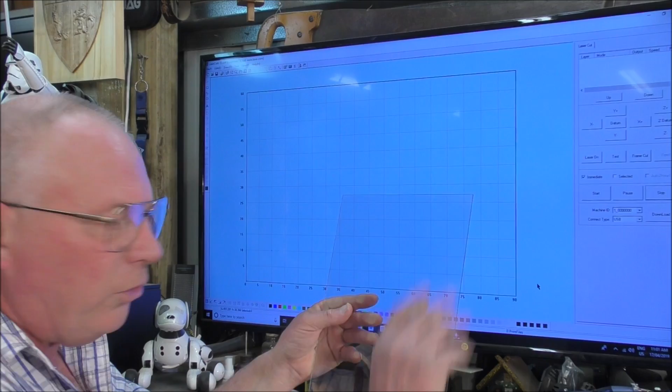Okay, so when you design a product, you start off with, I've got a piece of glass here which is about 1.5 millimeters thick, and it's 210 millimeters, which is 8.25 inches, by 295, which is 11.75 inches. So we're going to make a picture frame, and this is going to be incorporated, so everything is measured from this.

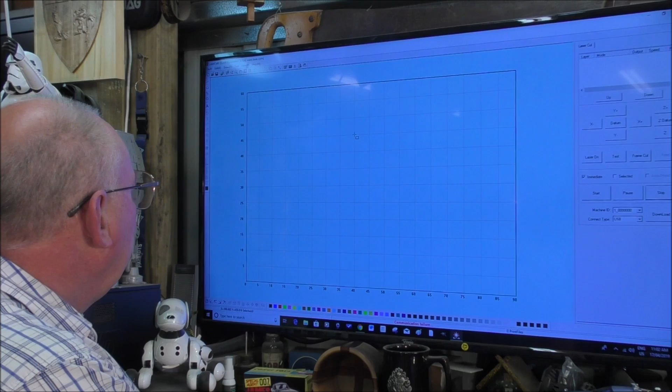So I'm going to quickly show you the process now of designing directly in LaserCut. And this is a very, very simple thing to design. So you just start up here and you choose rectangle, and you just come anywhere in the drawing area, it really doesn't matter, and just click once, draw out, click again, then go to the highlight tool, come to one side, right click, and then go to size.

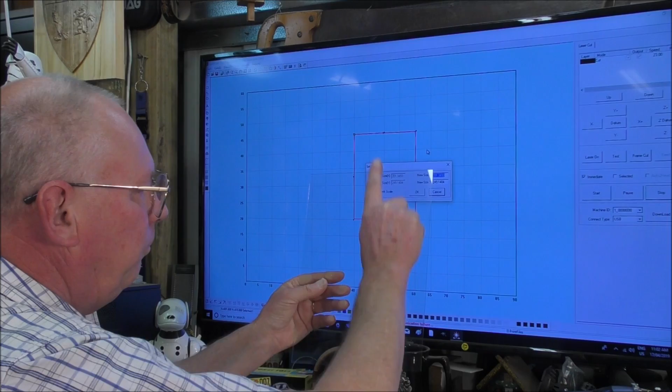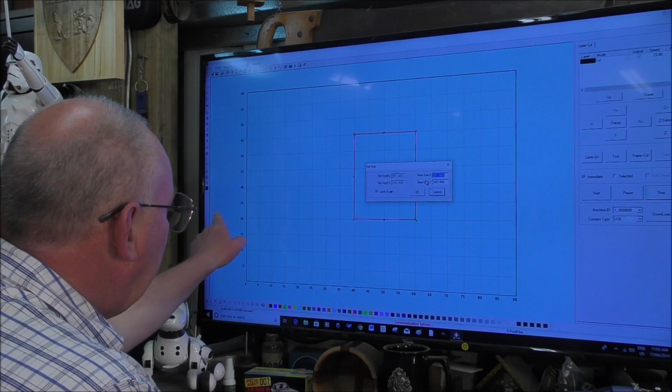Now in our case we need the open area, or the cutout area, to be slightly smaller than this. So we're going to make it about 5 millimeters or so smaller all the way around, so the glass doesn't fall through. So in this case it's going to be 285 by 200. So in the X, which is this way, it's going to be 200.

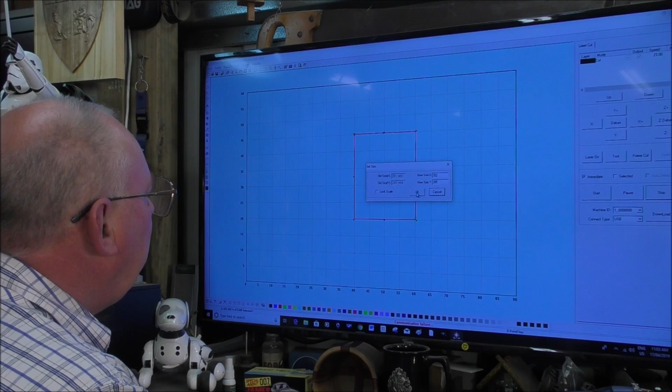So by the way, uncheck this, because otherwise if you alter the one, the other one will correspondingly alter with it. It will alter the aspect ratio. Okay, so in X we want 200, and in the Y we want 285. I press OK, and now it's gone to the right size. So it's at this point now where we want to align it. Well, actually it's okay where it is there.

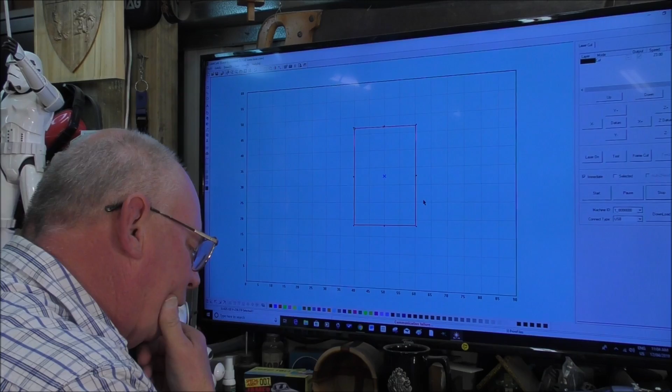So the next rectangle, which is going to be the outer part, we're going to give it about a 45 millimeter area all the way around for the frame. So it's going to be 300 by 400.

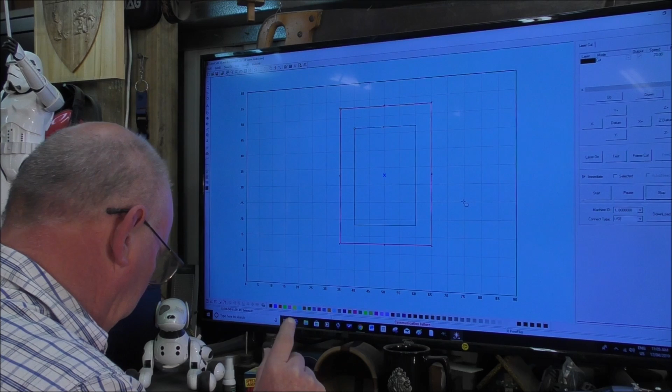So we just need to move the outer square down now. We still have it selected, and we can do that with the arrow buttons on our keyboard. So the next thing we're going to do now is choose some art and bring it in. Now what I thought was I'd just have a small design on each corner here and the top as well. So that's what we'll do now, is get some art.

Okay, I like this. This is a very nice, simple silhouette, I would have thought you would have called this, drawing. So we're going to use this one. Now, at the moment this is a JPEG. Not the computer, but the laser won't understand it. So we have to now change this to something the laser will understand.

We use a very simple program, which is a free program again. This is a Windows utility. It's called Paint. Free to everybody. All we simply have to do to this one is drag and drop it in, and resave it as a bitmap. That's what a laser understands, bitmaps. Okay, that's that one.

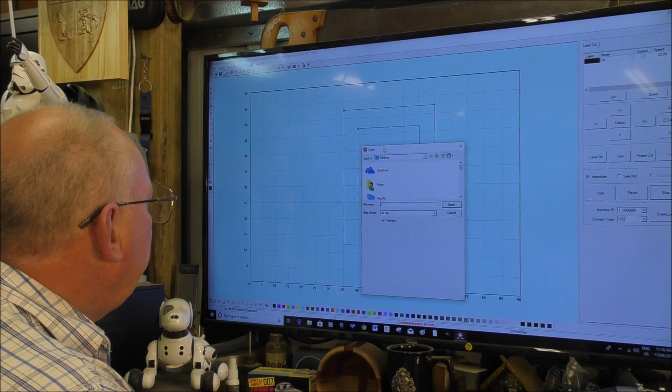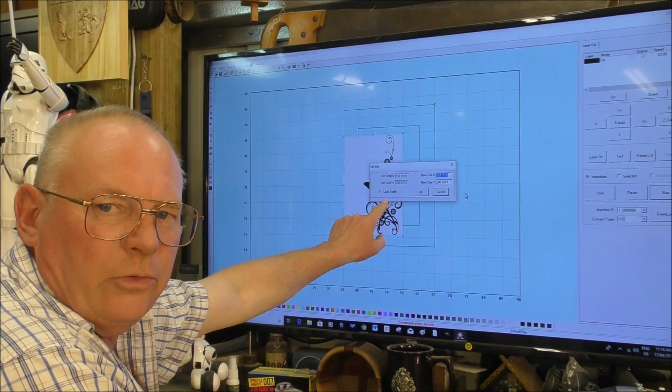I think actually we'll do another one as well. I'll keep the theme with butterflies, and very simply again we save this one as a bitmap and import on the desktop. So that's too big, so we put some handles around it or highlight it and then resize that. Now in this case we want the aspect ratio to be selected.

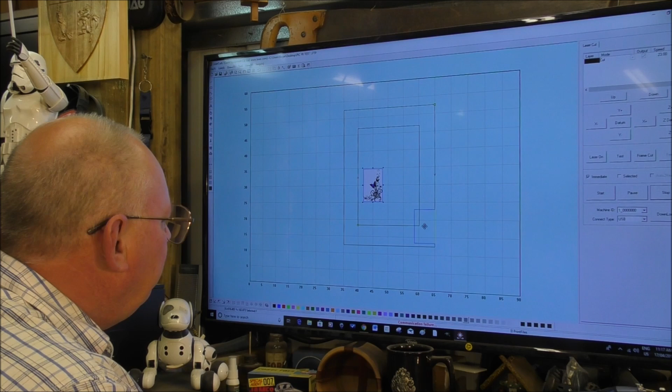So if we say we want this possibly 60mm wide, say 65mm wide, and let's just see how that fits on the corner. I think that's good. Now we've made this a size that we need, I need to make 4 copies of that. So to do that you come over here, 2 in the Y, 2 in the X. Now you've got to put a gap in between them, so 5mm gap in the Y and a 5mm gap in the X, and go, we have our 4.

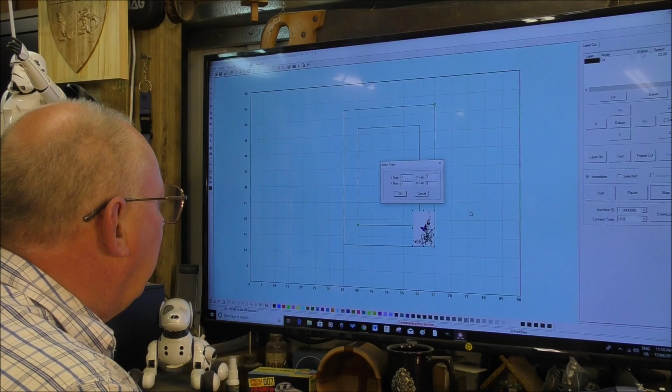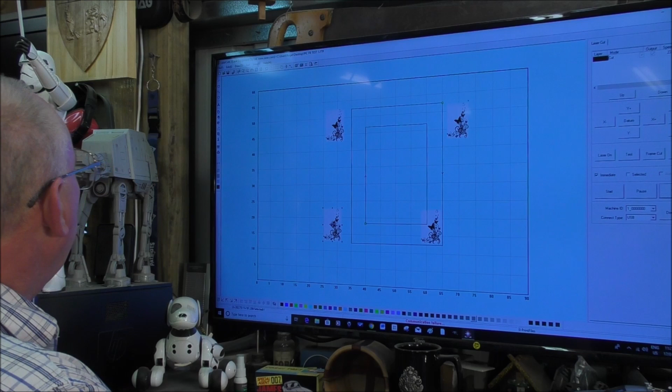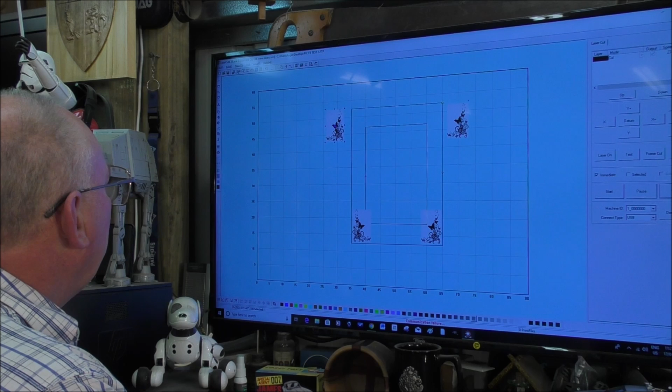Okay, so we've got our 4 now, so what we need to do is invert them and make them the right way around. So this one we need to make a mirror image, so we just come up here to draw and select that one, makes a mirror image. So we bring this one here now, and you can get it pretty exact. So this one we have to do 2 operations. We have to do that way around and invert it like that. So you can build up a picture very quickly and easily.

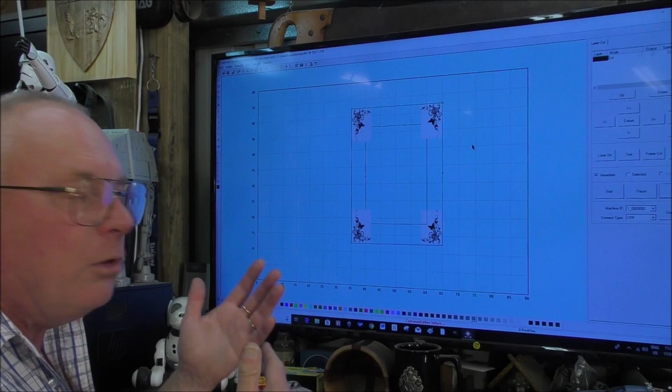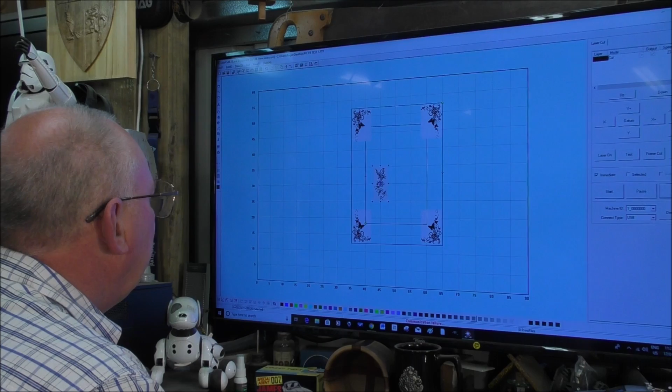So now we'll bring in our second picture. I thought we'd have this one on this side, one on that side, because otherwise it's a big area to have nothing at all. Don't worry about whether this is overlapping any of our lines, because it's going to be on its own separate layer. So basically our design is done.

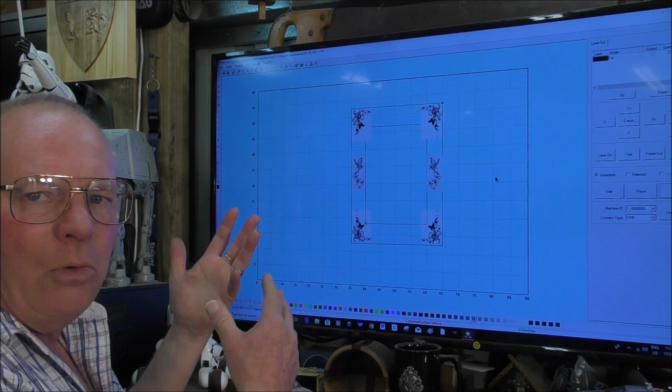Now our frame is going to be made up of 4 individual parts. This is the main frame that's going to be cut out of ply. So we have to put this onto separate layers, and whatever the order in which they appear in this listing up here, that's what the laser will cut. So the top one will be the first thing the laser cuts, and so on. So we have to consider what needs to be first. The etching needs to be first, so we're going to leave that on a black layer.

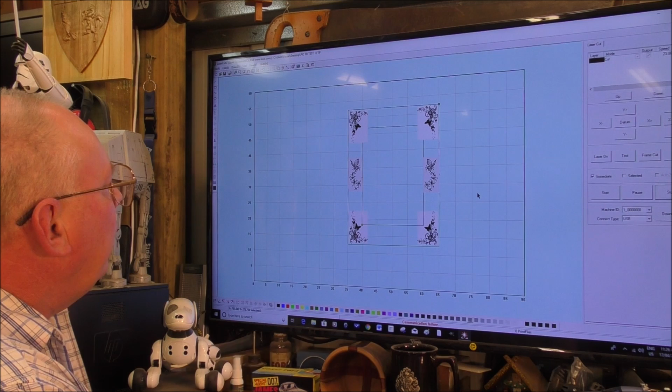Then we're going to highlight this one, because it's the inner part we want to cut out first after the etching. So that is going to go on a blue layer. And then the third and final operation is to cut the whole thing out. So then select this one, and that's going to go on a red layer.

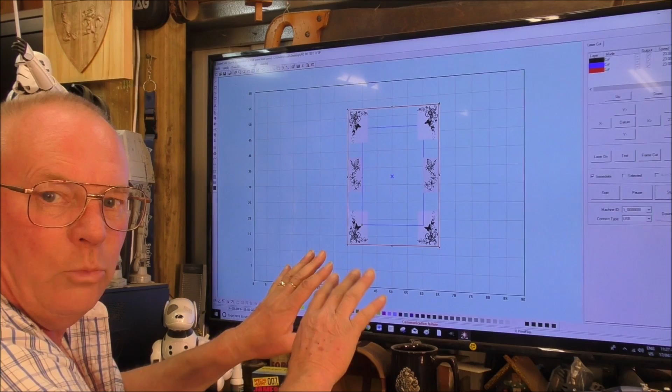So you understand? You have to have some forethought of, okay, well I want to do the etching first, because it's all going to be one piece. Then I'm going to want to cut the center part out, because that can drop out and away and it doesn't matter. Then the last thing, I want to cut the whole frame, finished part out.

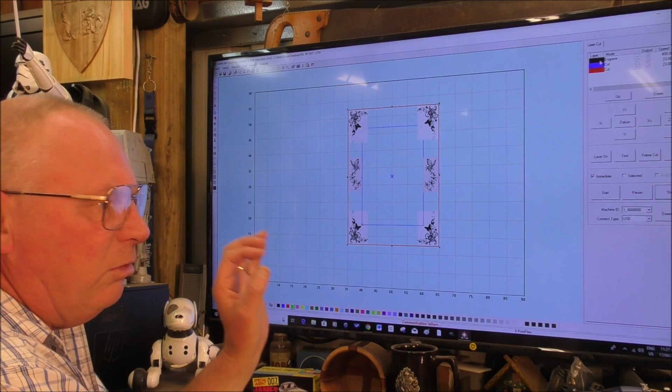So we're going to set this up now. We're going to go back to the first layer. No, we don't want that yet. Okay. It's an engraving layer, so you change it to engraving. And I want this to be a fairly deep engraving, a very nice, neat engraving. I don't want to see any scan lines whatsoever. So to do that, 400, I'm going to set that at 300.

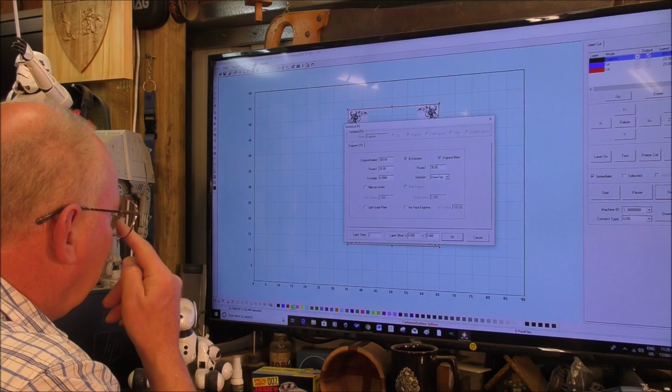That's 300 millimeters, so that's virtually 12 inches per second of travel of the laser. Bidirectional, so we're going to cut both directions. Engrave, blowing, always have the blowing on, whether you're engraving or cutting, because if it's not there to evacuate the smoke and debris and gas, while we're talking about that,

a lot of people have this misconception that a laser isn't dangerous. Well, it is. Whatever you have inside your laser, whether it be a piece of wood or plastic, especially plastic, the laser isn't necessarily burning it. That is part of the process. It is changing that material. When the laser hits that material, it's such a violent thing and such a huge amount of energy in such a small space on the material, it instantly changes it from a solid to gas.

Now, unless you have a filtration system filtering out the particulates, it's dangerous. It's carcinogenic. So if you're in a workshop, you just don't vent it straight outside, because then you're pumping those gases into the atmosphere. So it's very, very necessary for you to have a filtration system for your own safety as well as others.

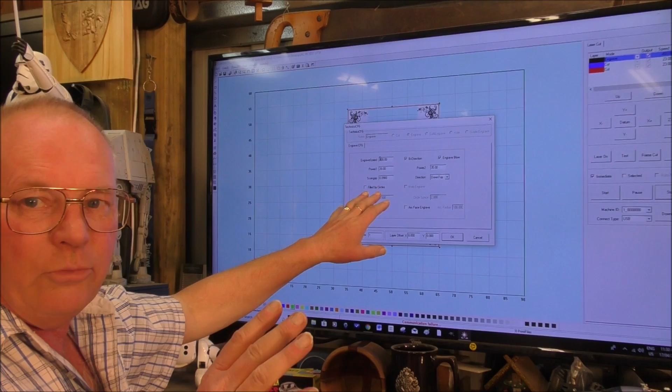Okay, having said that, I know with this machine it's 200 watt laser, so it only requires relatively low power to carry this out. Now, as I've said in other videos, although we're saying 20% and 35%, that doesn't give you 20 and 35 watts. That gives you about 35 watts and about 45 watts, because it's not a linear scale. I have gone into that in earlier videos, so go back and have a look at some of my earlier videos.

Okay, so these are set right because the last job just happened to be an etching that I was doing. Now this, they call it scan gap, but it's the step over. Each time the laser makes a pass in the X, it will step over or progress in the Y this measured amount. So in this case, it's 0.09. Now in earlier videos I have shown you demonstrations and explained how this comes about.

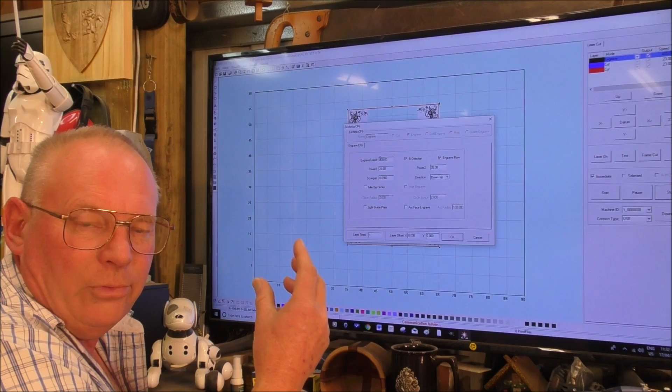I've got a 2.5 inch lens. Now you would think that the spot size would be 0.2 of a millimeter. Well, it's not, depending on what speed you're traveling. The faster you travel, the spot size gets smaller, because of the energy shape of the laser as it hits the material. I've talked about that in other videos too. So you have to have this knowledge behind you before you can do these things successfully. So I urge you to go and have a look at my other videos.

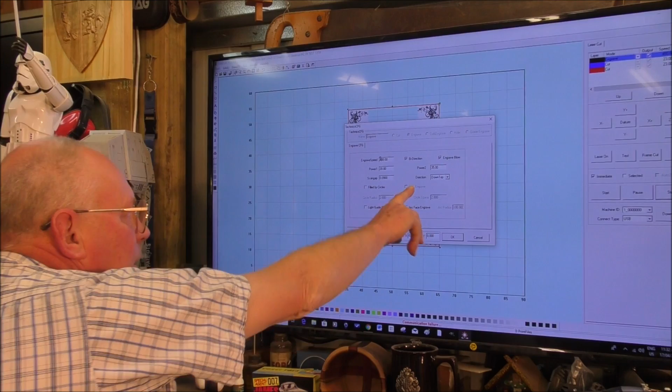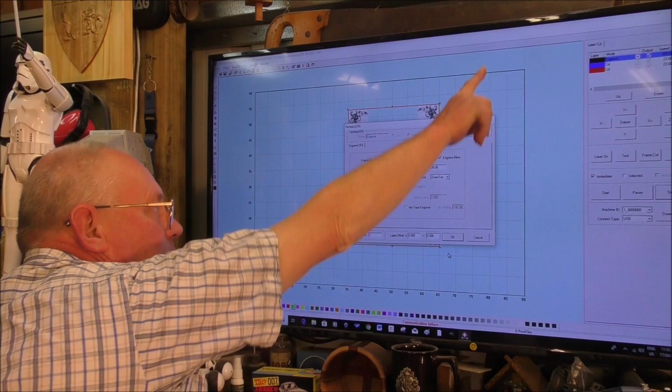Okay, top down is Chinglish for bottom up. In other words, it'll start etching down the bottom here and work its way back, which is preferable because the airflow is going that direction. Okay? So we're going to say this is all good and there's nothing else to fill in here. This is only necessary to be filled in if you had a full sheet on here and you're in the home position with the machine, in my machine the home position is in this back corner here. If you wanted a particular spot to cut out on the sheet, then you would fill this XY coordinate in.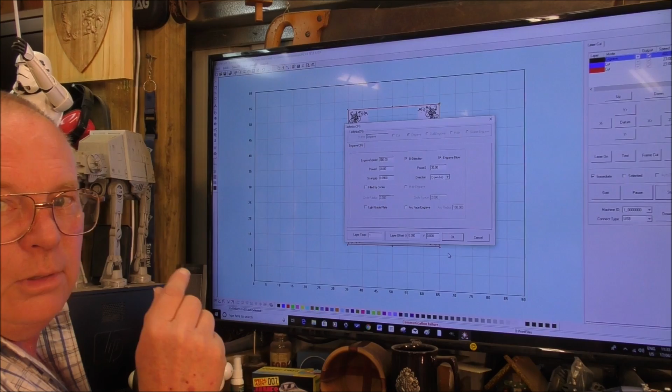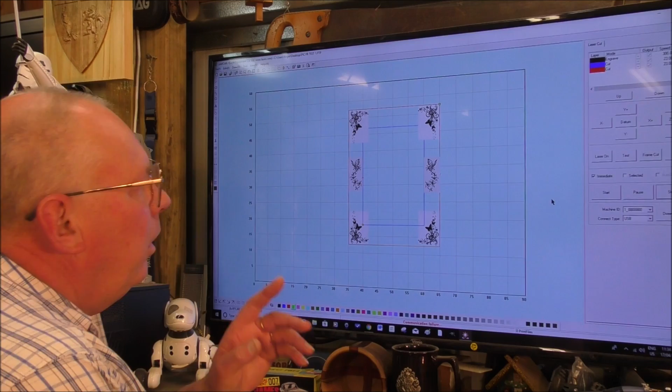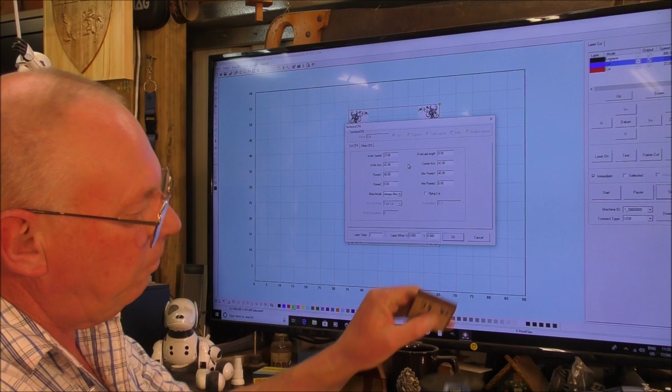But in our case we're going to set the 0, 0, the start of the program, which is indicated by this little yellow box here. We're going to set it actually on the material. Okay, so we're going to calculate that. And it's calculated. Very quick computer, this one. Okay, so the next thing we want to do is cut that center piece out, which is on the blue layer. Now the material we're going to be using for the frame is plywood and it's 4.5mm thick.

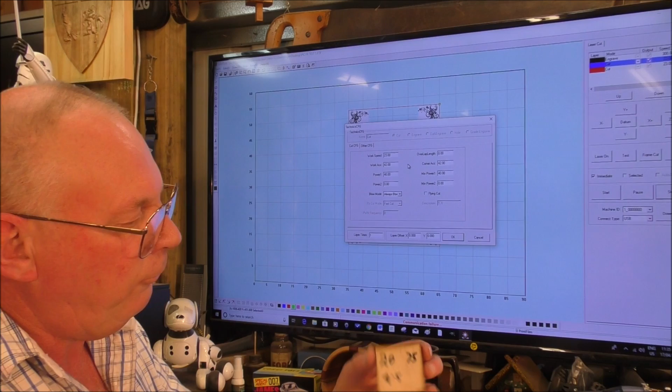Now you will see in earlier videos, one of the first videos I did, that I cut these out where I was chasing the correct cutting feed and power rate to find out which was the best and quickest way to cut this out successfully, because it's all about speed as well. And in the case of my 100-watt laser, it works out 24 millimeters per second cutting speed at 85%, and very, very clean cut. See, no burning, just a very, very clean cut. And so this is what we're going to be using.

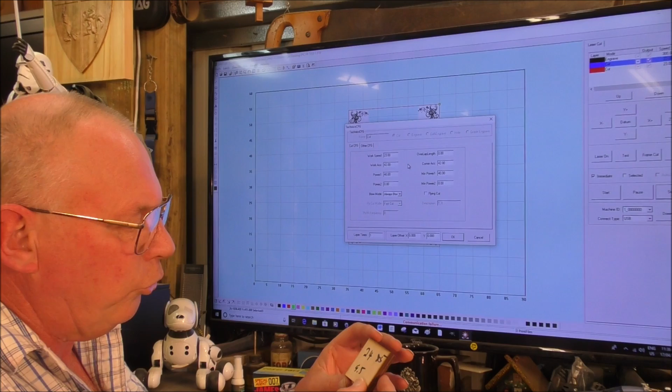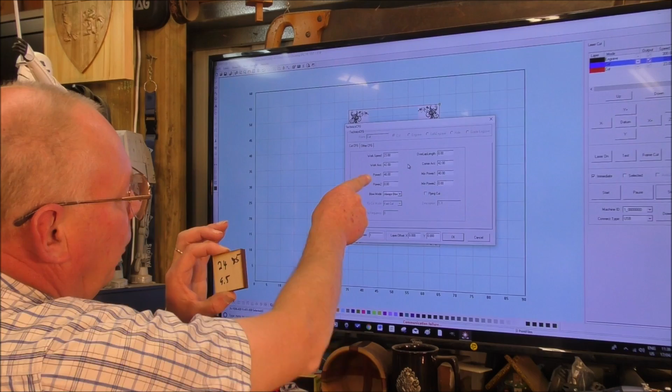These are what's called telltales. So you do a test with your laser to find out which is the best for a particular material to cut it or etch it. So you make these storyboards and keep them as a reference. So when you come to this material again, you know exactly what to put in here. So that's what we're going to do now.

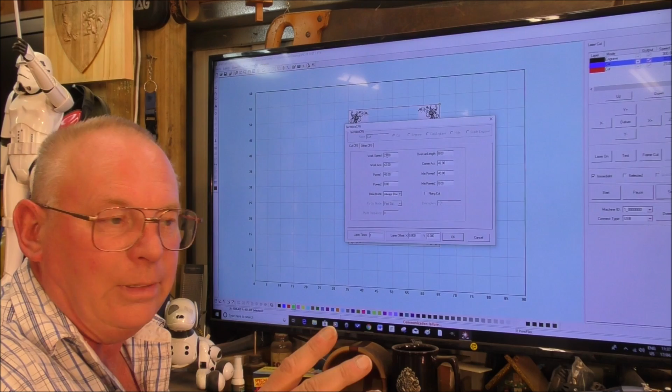Oh, and incidentally, not every time you use a laser, I suppose it depends on what you are cutting in it, but every couple of days or every couple of uses, clean your mirrors, because if you don't clean your mirrors, these figures will alter. You can lose 5–10% just by having grubby mirrors. So clean your mirrors.

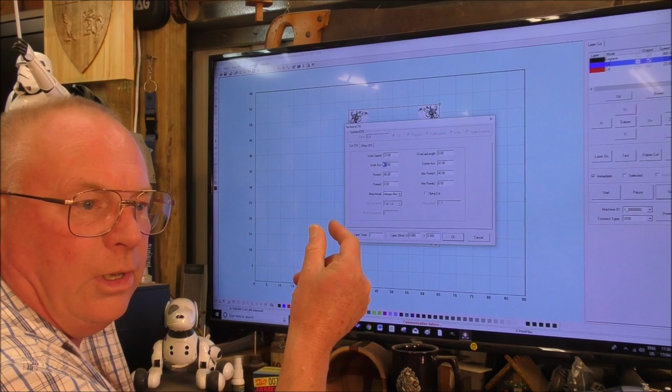Now when you're cutting, what I'm going to do is step this up to 90. I know 90% of 100 watts. That'll push the laser straight through the material immediately. To cut the initial hole in the material, you need high power as quickly as you can. So this is like striking the arc, as it were, because it's going to immediately punch a hole through. So we're going to go maximum power of 90,

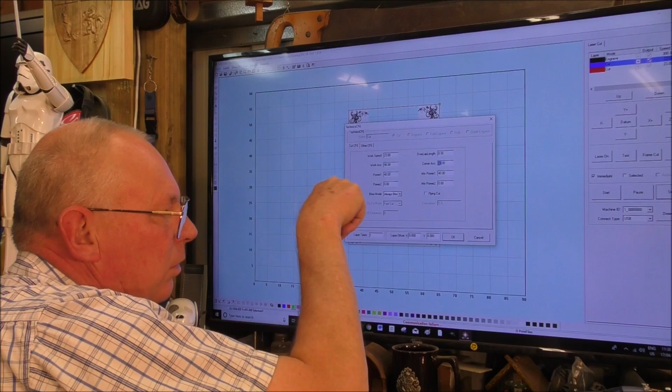and again in the corners, because of this thing called beam drag, there's some delay from the laser changing direction. It can hang up in the corners, so you give it an extra belt in the corners. I'm just going to do 88 there. That'll do for that. And 85.

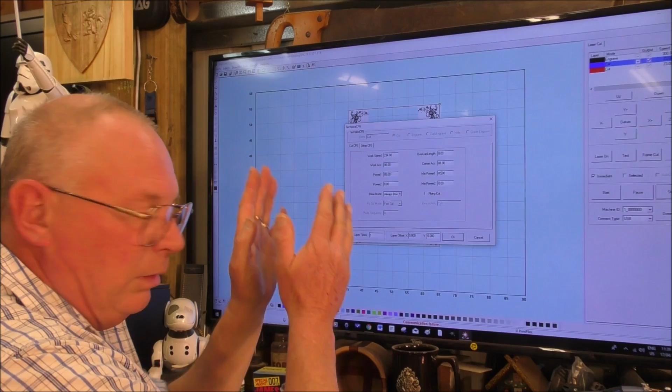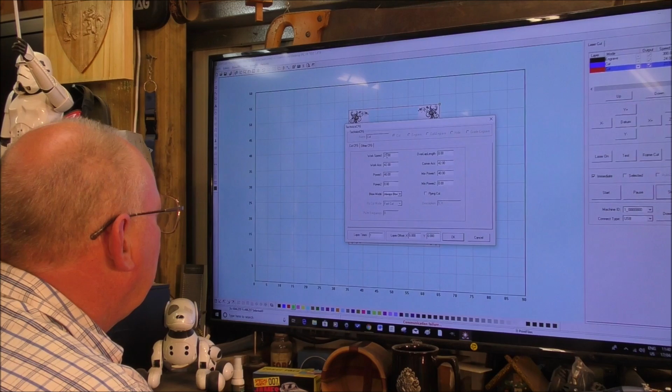So you set power 1 and power 2. When you cut it, you set it the same percentage. You don't want any variation there. Always blow it, and we calculate that. Okay. And the same for this one. And it's as quick as that. We've made the main part of our product. And in real terms, you can do this in 5 minutes.

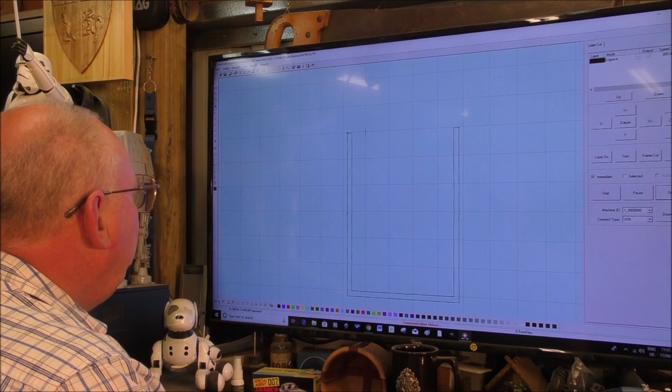Okay, I've just quickly drawn the stepping out part that the picture on the glass is going to slide down into. So now I want to draw an angled piece that is going to be stuck on the back to hold the picture up at an angle. It's just simply line drawing. It's as simple as that. Put that on a black layer. This is going to be put on a blue layer.

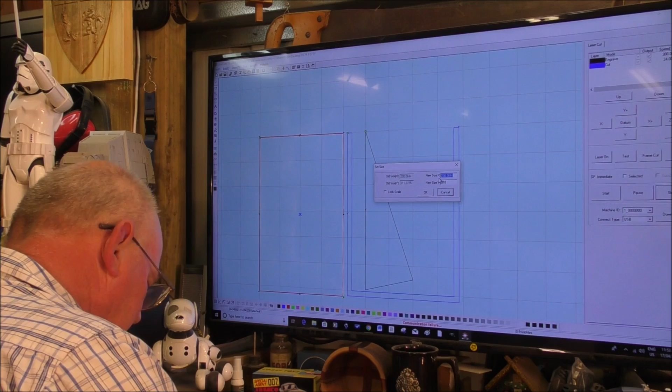Now for our last part, which is the panel that gets glued onto the back. Now you can move these around by the arrow keys on your keyboard. I like to leave between a 3 and a 5mm gap, because otherwise the material warps and you can take it out of focus slightly. So just leave yourself a good gap. And that one we're going to put on a red layer. So these 3 parts are all going to be made of the same thin gauge material, which is a 3.5mm ply.

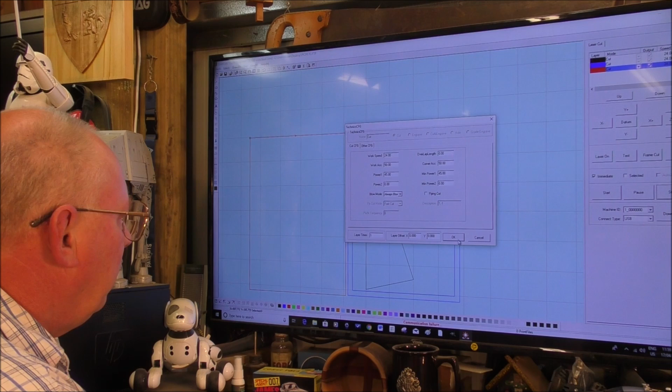So now the first piece we need to cut out is this one, which is on the black layer, which indeed is correct, but we need to have it cut in. Okay, 24mm a second, fine. With this we're going to go 50, corner 50, and we're going to go 45 and 45. Blow in, everything there is okay, and we're going to say okay. Blue layer, which can be the next one to be cut out. 24, 50, 50, 45, 45, that can be cut. And the last layer, 24, 50, 50, 45, 45, and that can be cut in that order.

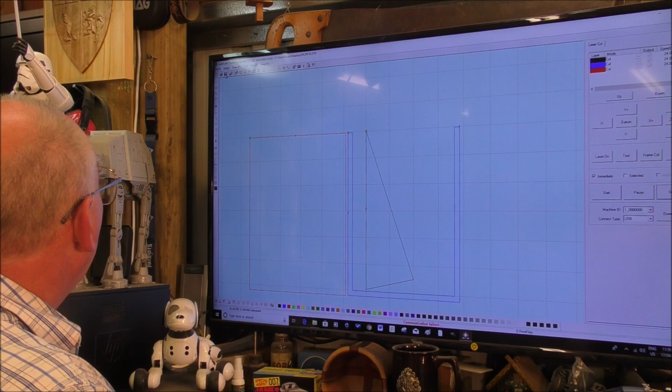So we're getting 3 parts out of the same material, and the only part that is going to be, well, not really wasted, because we could cut a second one of these out if we wanted to. So you use the minimum material that you can. Okay, so that can now be saved, and next thing is we'll go to the laser and get this job done.

Okay, we've got our piece of material now set up squarely on the table there. I've got the program set into the computer, and I just want to point out one thing to you. When buying material for your laser, it needs to be flat. Now, it's the first piece of material I picked up. Can you see down there? It's warped like a banana. It's totally useless for a larger job like this.

It's going to be 400 long, and if we set the laser height, the Z height here, which is 9.5 millimeters above the material, and it has to be plus or minus a millimeter, it's fairly precise. By the time we get here, it's only going to be 3 millimeters above the material. It's going to be totally out of focus. So when we're doing our etching, it's going to look not very nice. So for smaller jobs, this piece is fine. But for larger jobs, it needs to be totally flat. And I'm lucky I have a flat piece. So, here we go.

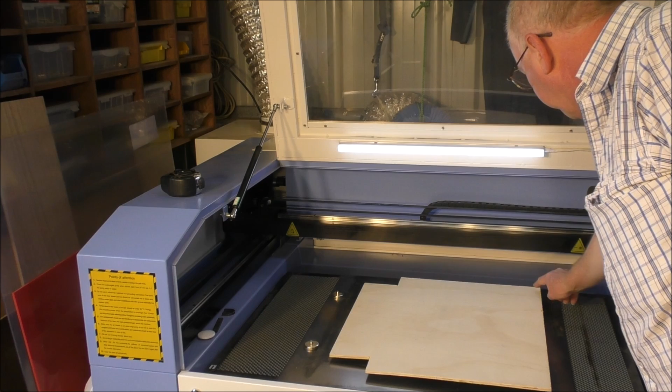So now we'll start the laser up and load this up to the laser, and we'll start the etching. So now I'm going to set the start of the program somewhere about here. That means we're going to set the Z height. So we'll lower the Z first, just an amount. Now we'll bring the head over to this plate. Okay, now we'll set the Z height.

So now we'll set the XY 00, start of the program. I don't want to go right out to the edge of the material because there are some rough pieces. That'll do there. So I'm just going to run a test now around to see if it all goes on there.